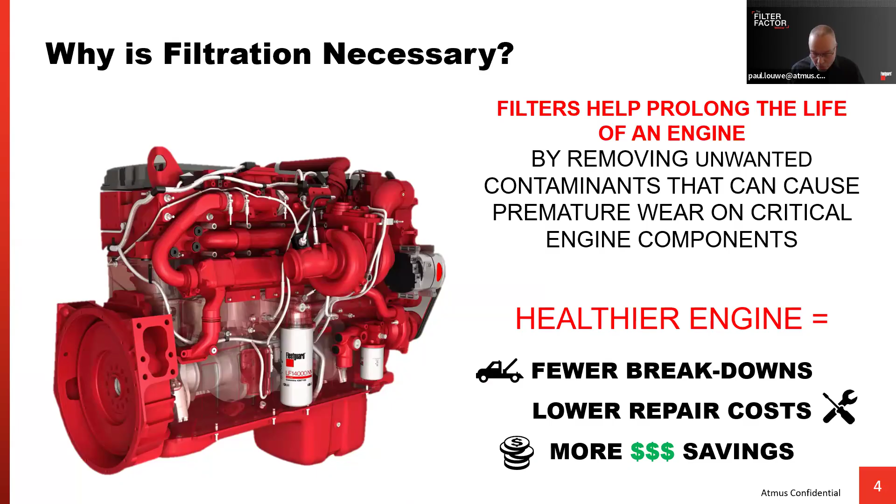So why is filtration necessary? We're going to look at filtration a little bit closer. I'm going to show you another video about air filters and efficiency. It's actually all about protecting the equipment using quality filter media.

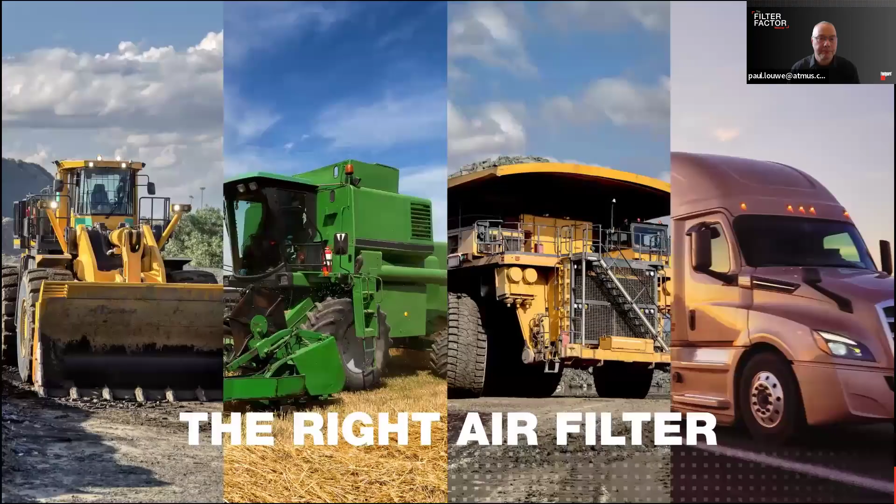Filtration, down to the science. Today, we're talking air filter efficiency. Filter efficiency ratings, 99, 99.9, 99.99%. They're pretty much the same, right? Wrong. Each filter is rated to perform in specific equipment applications and with particular types of contaminants. Using improperly specified or low-quality filters to save a little money can have long-lasting and potentially costly consequences, like lower torque and horsepower and poor fuel economy, all resulting in a shorter equipment lifespan. That's a high price to pay long-term for a small savings short-term. You get what I'm saying? Using properly rated, high-quality filters for your specific equipment and application ensures you get the performance and protection you need to stay productive and profitable. Fleetguard filters offer unmatched media technology to protect your equipment and keep you going. Why? Because when it comes to filters, small things make all the difference. Run cleaner, longer with filtration science.

The video talked about contamination and efficiency. Let's start with explaining contamination. Where is contamination coming from?

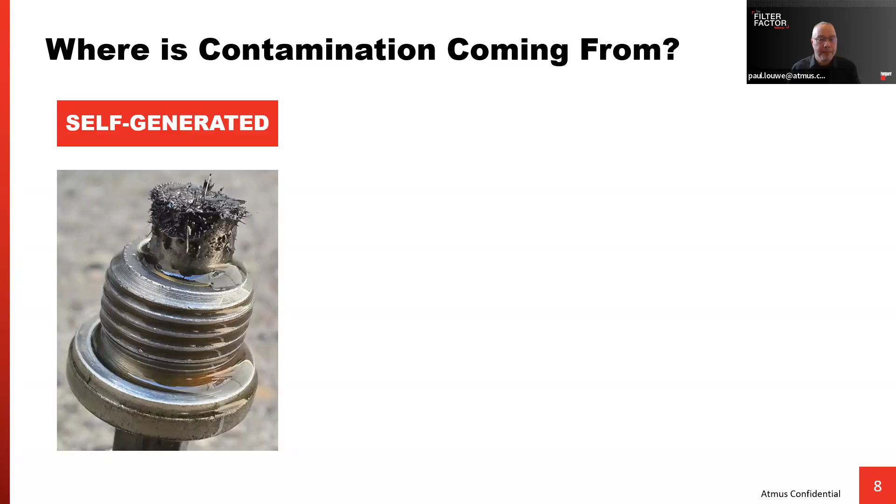Well, the first type of contamination is self-generated contamination. This is a result of normal engine wear and engine component wear that occurs over time. The second type is built-in contamination. These are the left behinds within an engine because of the engine or engine component manufacturing or even rebuild processes. The third and last one is ingested contamination. Particles enter an engine from an outside source.

All these types of contamination must be filtered out from the different engine systems. But of course, the same applies to other types of applications or systems, like a hydraulic system or tank air breathers.

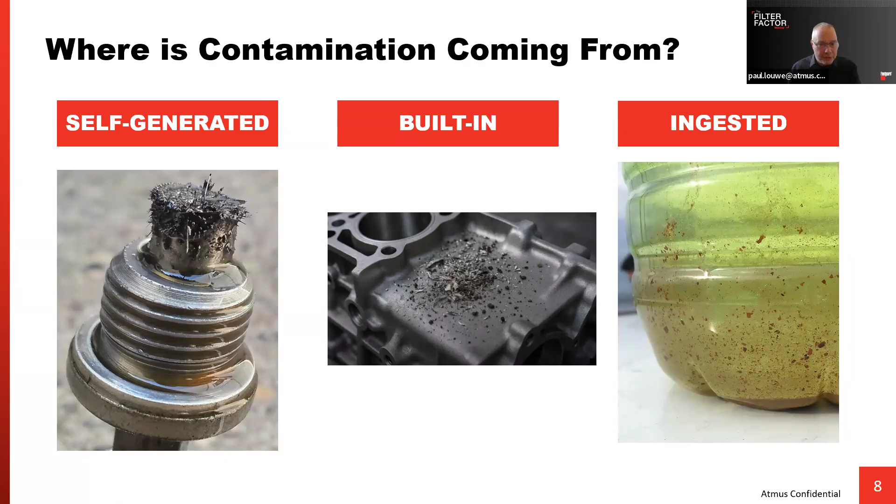Besides contamination in air systems, like this one, other engine systems also need to be protected against contamination, for example, fuel systems, oil systems or lubrication systems, and coolant systems.

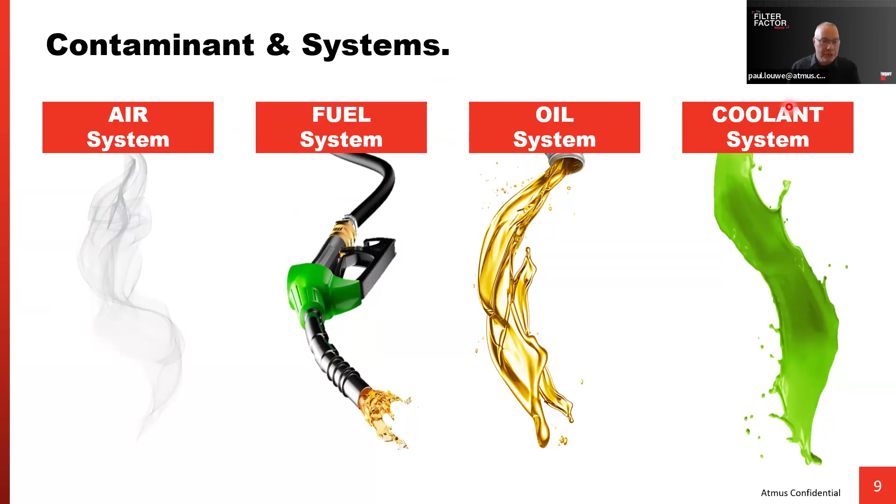This slide is about the types of contamination that we will see in the different systems. In air systems, we mainly see dust, dirt, and sand. This is what we also find in fuel systems. Besides dust, dirt, and sand in fuel systems, we also see water, microbes, and additives.

In the lube system, we will find, besides dust, also wear metals and oxidizing oil, sludge. So poor filtration or low filtration media quality, not efficiently filtering out contamination, can cause unwanted engine and engine component wear, and that results in failures and high TCO, total cost of ownership.

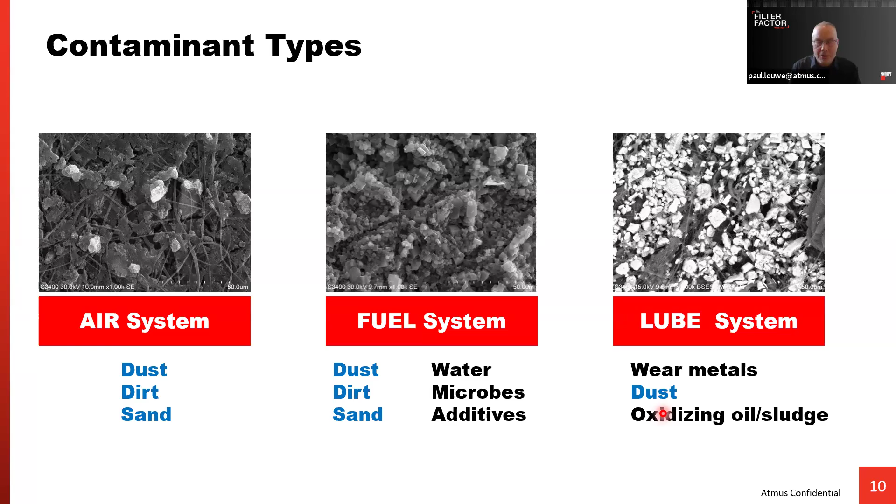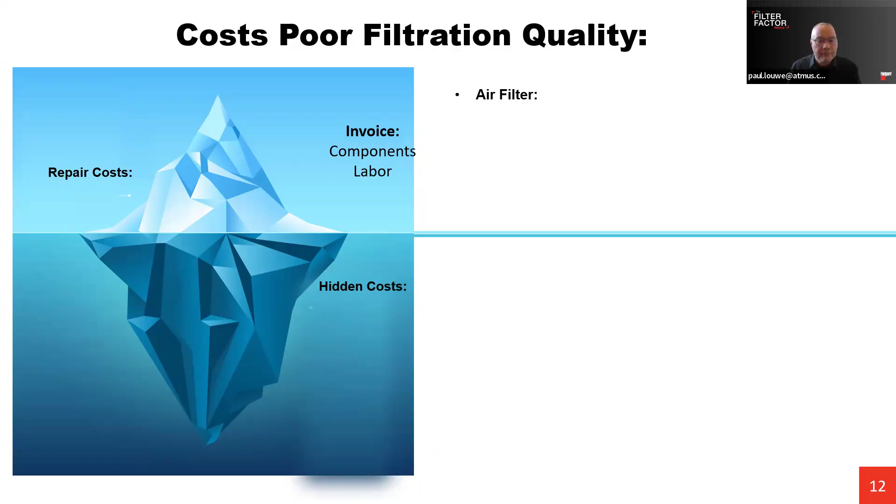Let me give you a few examples of costs when poor filtration media quality is used in, for example, air filters, fuel filters, lubrication filters, causing high TCO. Air filters having poor filtration media quality that results, for example, in a catastrophic engine failure. The engine needs to be replaced. For small to medium-sized engines, we're talking about $6,000 to $18,000. If we only need to replace a component instead of an engine, for example a turbo, we're talking about $4,000 to $5,000.

Something totally different in cost: fuel system component damage to injectors or fuel systems because of poor filtration media, $8,000. And I'm not even talking about engine components, repair, replacement, or after treatment damage costs.

The last one is the cost resulting due to poor filtration or a cheap lubrication filter, $11,000 to $12,000.

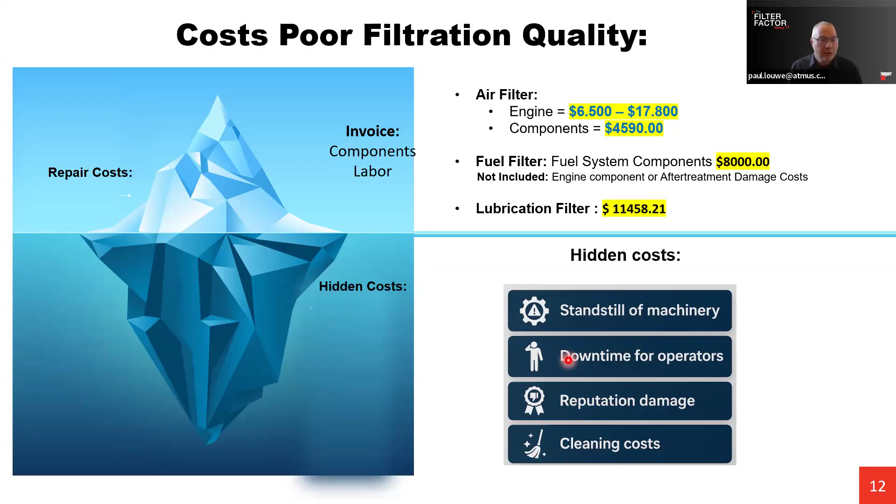Now, besides the repair costs, there are also hidden costs for the fleet owner or for the company. Hidden costs, for example, standstill of the machine, the cost for the downtime of the operator, cost involving reputational damage, or cleaning costs.

So the big question actually now is: is it really worthwhile to compromise on filters? Today's engines require quality filters that are capable of filtering out the smallest contamination particles. But how small is small? With today's engine technology, we are talking about micron size small.

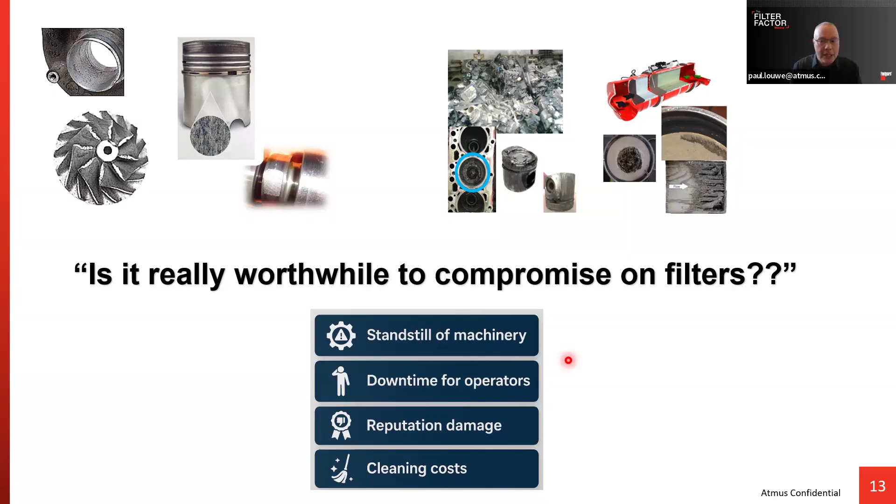We're talking about bacteria size small, micron rating. For your information, 1 micron is 1/1,000,000th of a meter. So it's very, very small.

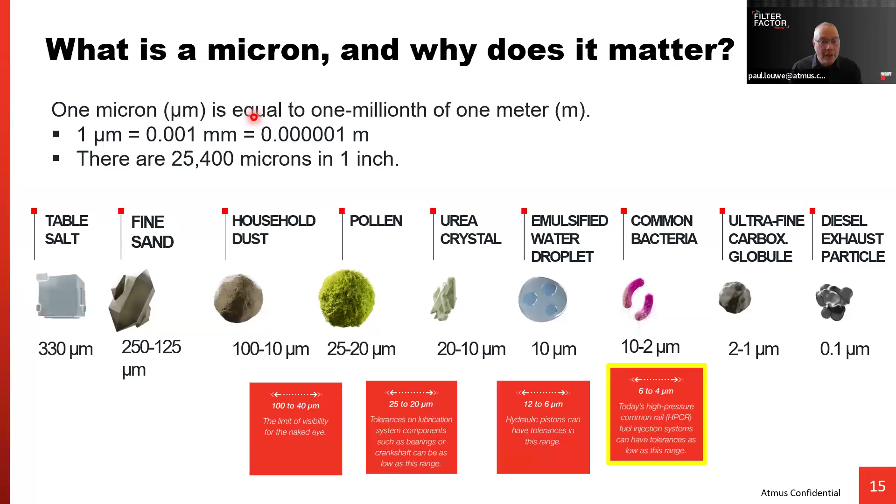Now, with having the contamination explained and the possible cost when poor quality filters are used, let me move to explain efficiency and beta rating. I'm going to start with explaining efficiency first.

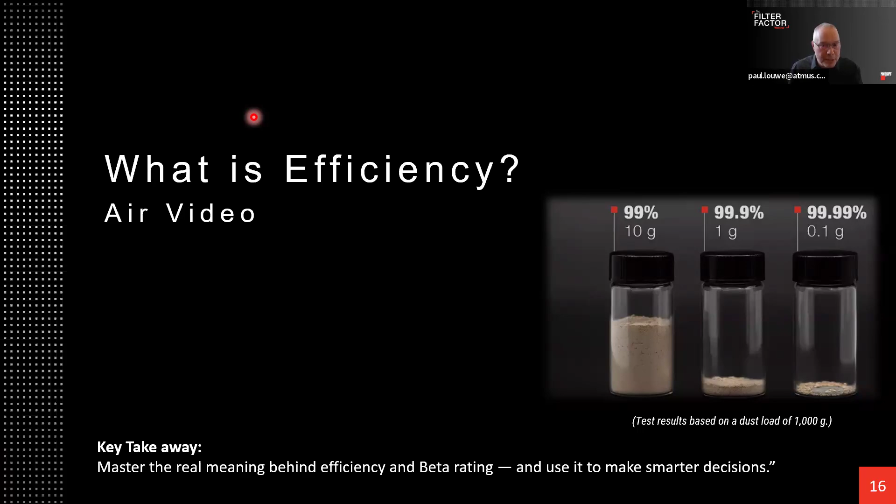So the air video talked about 99%, 99.9%, and 99.99% efficiency. But what does this terminology mean? We're going to use this example.

What we see here is the filter and the inside of the filter. This is the filter media. With this example, the media pores is 10 micron. We have the inlet side of the filter, for example a gas or a fluid like fuel, gas, LNG, or air, oxygen, containing dust or sand or dirt or microorganisms like we discussed with fuel. The inlet side is also called the upstream side, and we have the outlet side, which is the downstream side.

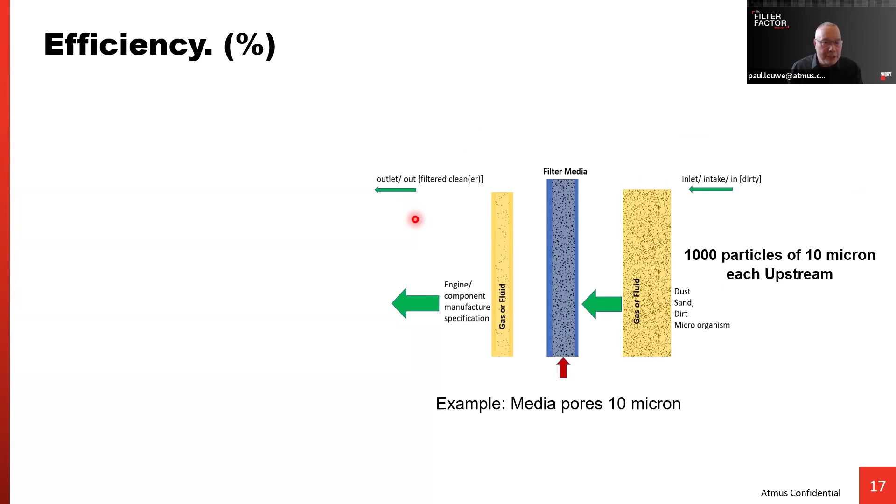If we present 1,000 particles of 10 micron each upstream, then the efficiency is the ratio between the number of particles captured by the filter media, that is what we see here, and the number of particles presented upstream, the 1,000 particles in this example.

So the air video talked about 99% efficiency. What does this mean if we present 1,000 particles upstream? Then 990 particles will be captured by the filter media.

With 99.9% filter media efficiency, 999 particles will be captured by the filter media.

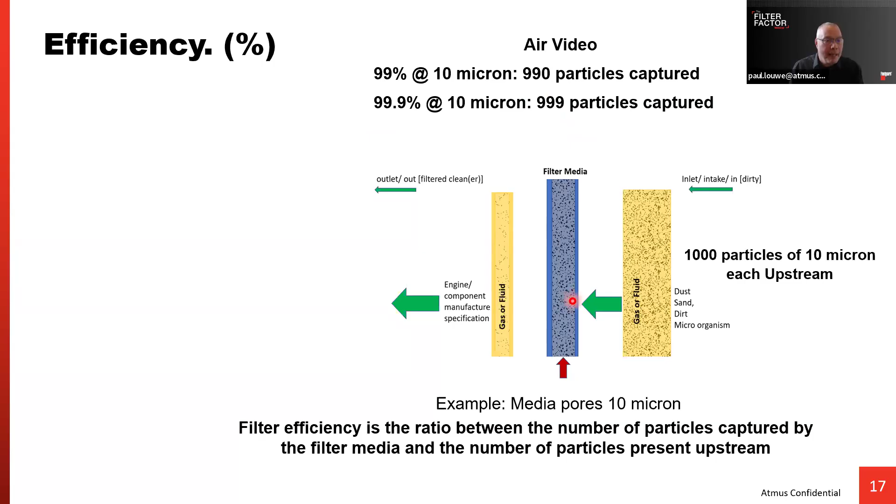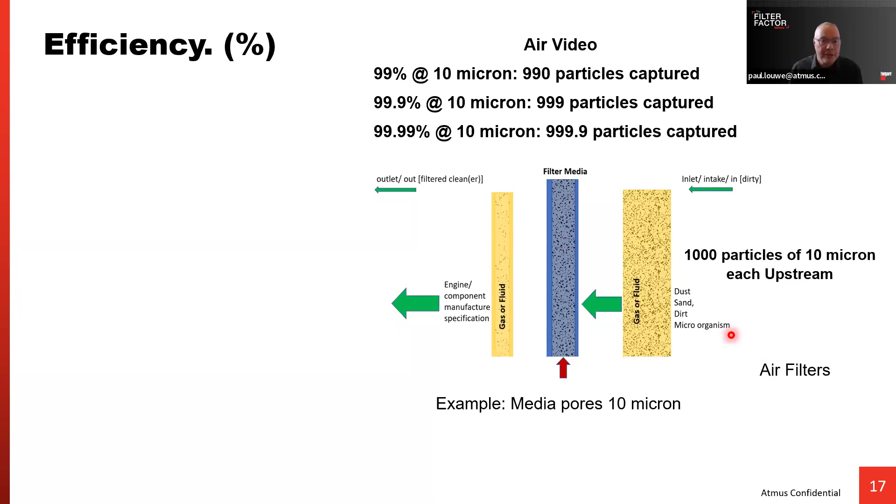So what is beta rating? I'm going to use an example of beta 10 equals 20. That is what you see here.

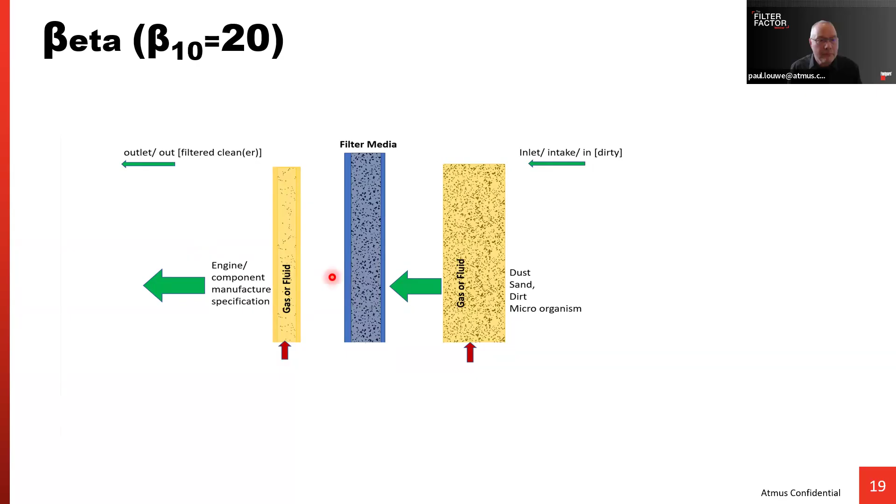We're going to use the same setup: inlet, upstream, downstream, the outlet, the cleaner side of the filter. But we're not going to look at the captured particles in the filter media. Again, with 1,000 particles presented upstream and then 50 particles seen downstream, the beta ratio is 20, because 1,000 particles upstream divided by 50 particles downstream gives a ratio of 20. So beta 10 micron is 20, because of the ratio between upstream and downstream.

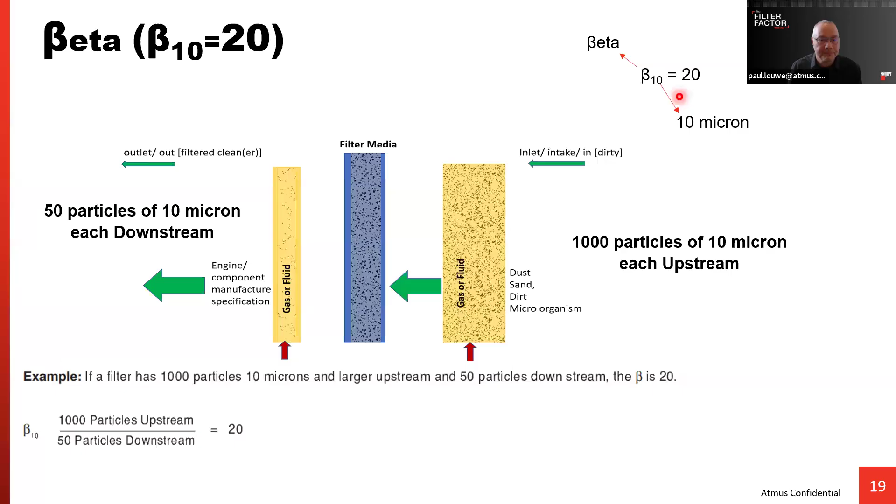Where do we see this data? Hydraulic filter data sheets, and more on fuel filter data sheets.

But what is the advantage of using beta rating instead of efficiency? Well, with today's engine technology using the high pressure common rail fuel system, ultra clean fuel is needed downstream. Downstream means fuel flowing to the highly sensitive fuel components. And only beta rating makes this instantly visible.

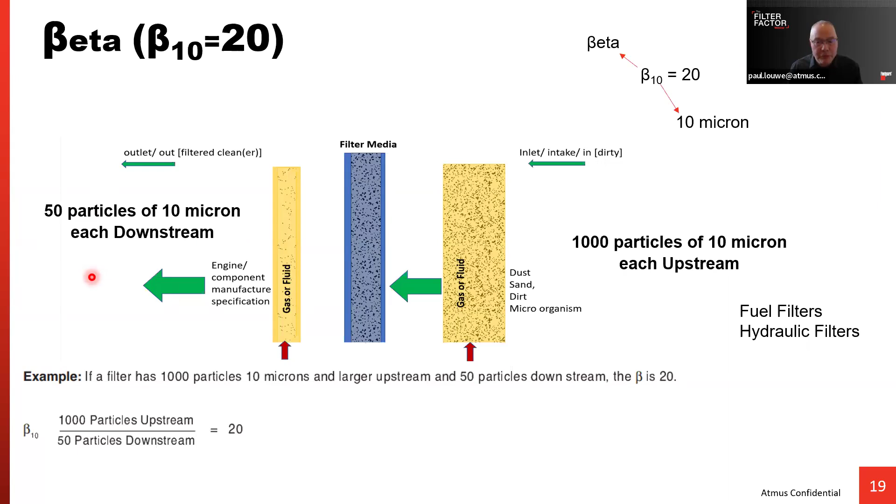With beta rating, the performance differences between filters are truly visible. But how does this work? I'm going to explain that on the next slide.

In other words, the advantage is that with beta rating, we instantly see the improvement in removing harmful contamination. In this example, we have 100,000 particles upstream, so the dirty side of the filter, or we can also say 100,000 particles presented to the media.

To explain downstream, the clean side of the filter, we have mentioned different numbers of particles, from 50,000 to 100 particles.

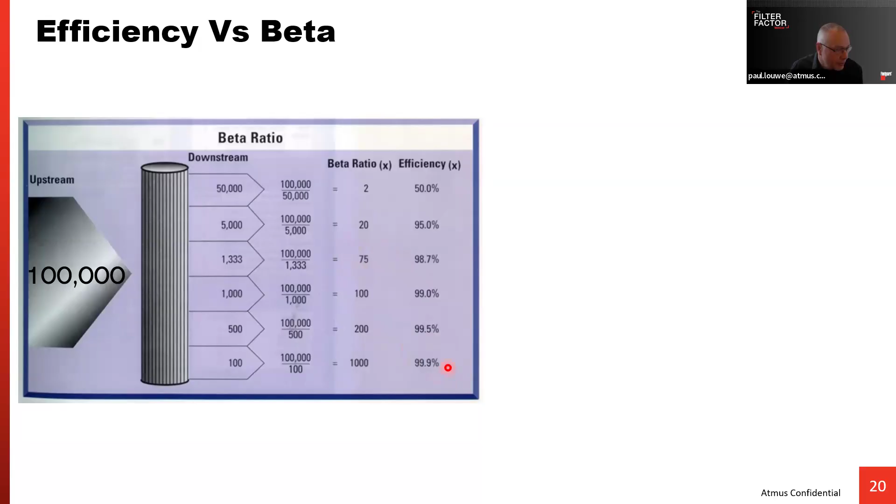Now we're going to look at beta 75 versus beta 1000. So, 98.7% and 99.9% efficiency. 98.7 equals a beta rating of 75, and 99.9% equals beta 1000.

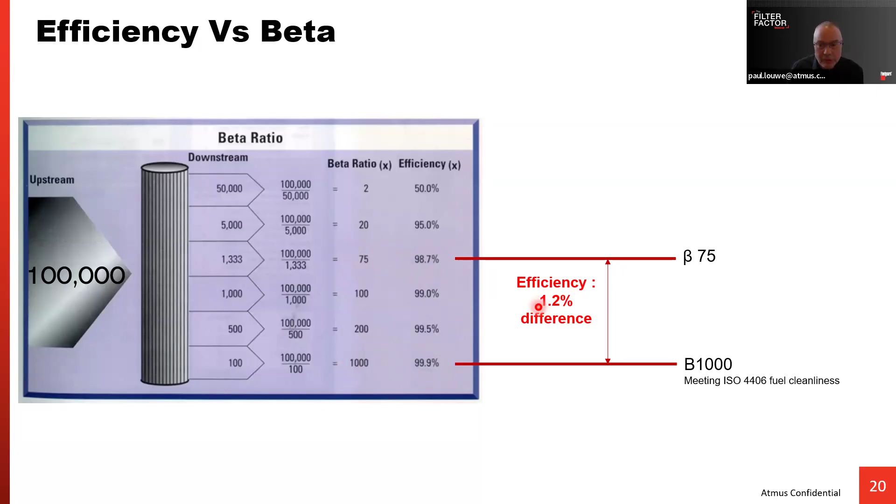The efficiency difference between 98.7 and 99.9 is only 1.2%. So people think, oh, that's not a lot of difference. But with beta rating, what we will see is that a beta 1000 is 13 times cleaner downstream. Beta 75 versus beta 1000 means the beta 1000 is 13.3 times better. Beta 1000 versus beta 20 means the beta 1000 is 50 times cleaner downstream.

Notice also that a beta 1000 is also meeting the ISO 4406 fuel cleanliness standard, which I will explain a little bit later. But as mentioned, not all data sheets mention beta rating, so there is a very easy formula to convert efficiency to beta rating, and that is what I'm showing here.

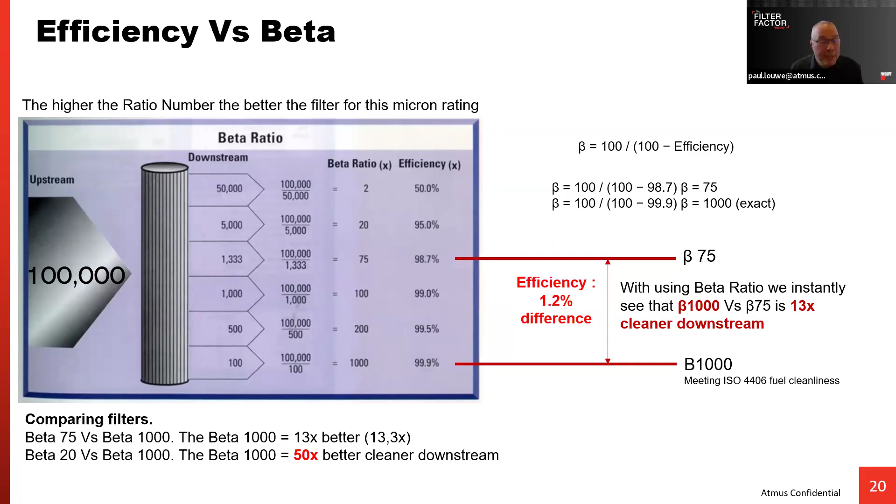Now, with having explained the particle size and the rating, efficiency and beta rating, the next slide is an example of real filter media performance, protecting sensitive equipment and minimizing downtime. That is what we see here again, the ISO 4406 fuel cleanliness.

Now, without me going to explain the ISO 4406 in depth, it is, I think, good to know that fuel system manufacturers like Bosch, Delphi, Denso, or Cummins, and also other injector or high pressure common rail fuel system manufacturers, are using this ISO 4406 as a standard. It's a standard fuel cleanliness code for modern high pressure common rail diesel systems.

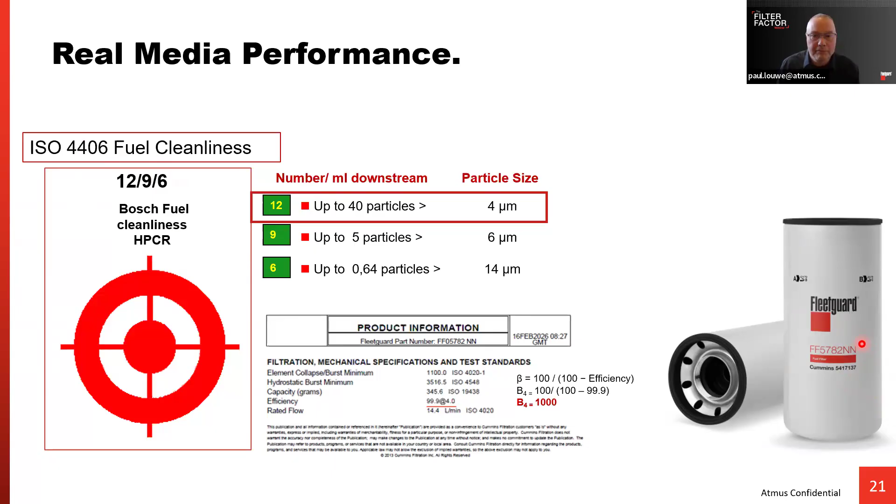So what was the key takeaway of this part of the training? Well, efficiency is what the media captures, and beta ratio gives us a true indication of how reliably the filter protects. Beta rating is what reveals the real performance difference between filters, and that is actually the information you need to make the right choice.

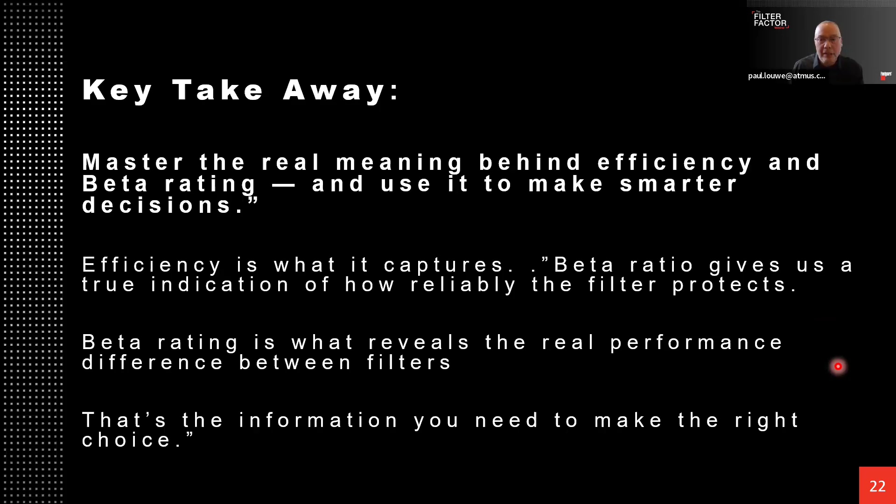Now, with having explained efficiency and beta rating, and the differences between them, there are 2 additional subjects, capacity and flow restriction. A 1-slide explanation: capacity of a filter is the amount of contamination that a filter can hold, and flow restriction is the amount of resistance that an air or liquid experiences when passing through a filter. Efficiency, capacity, and flow restriction are all the important topics to design a filter.

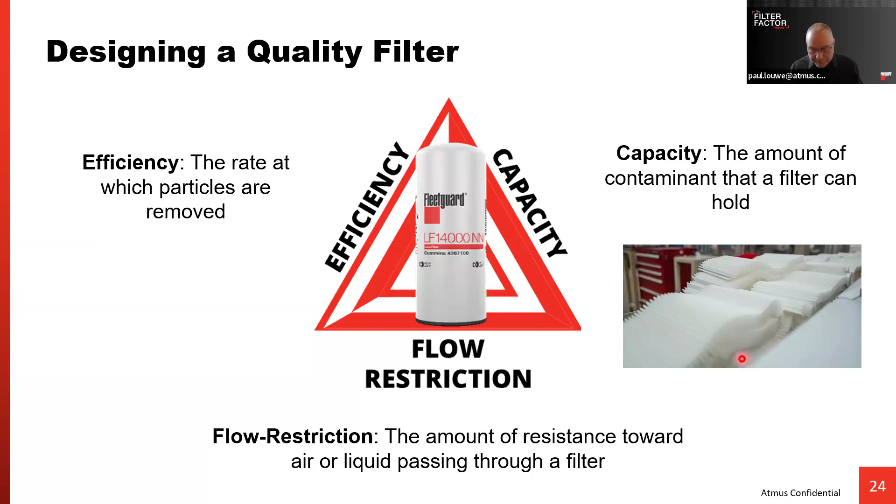And all filters have one thing in common, and that is filter media. So now we're moving into the heart of filtration, the filter media.

So where is filter media made? Well, some filter manufacturers do manufacture their own filter media, but most filter manufacturers do not produce or manufacture their own media. Cummins, however, designs, manufactures, and tests our own filter media in-house. It's proprietary, and we do not make this filter media available to any of our competitors. So it's unique to Fleetguard filters.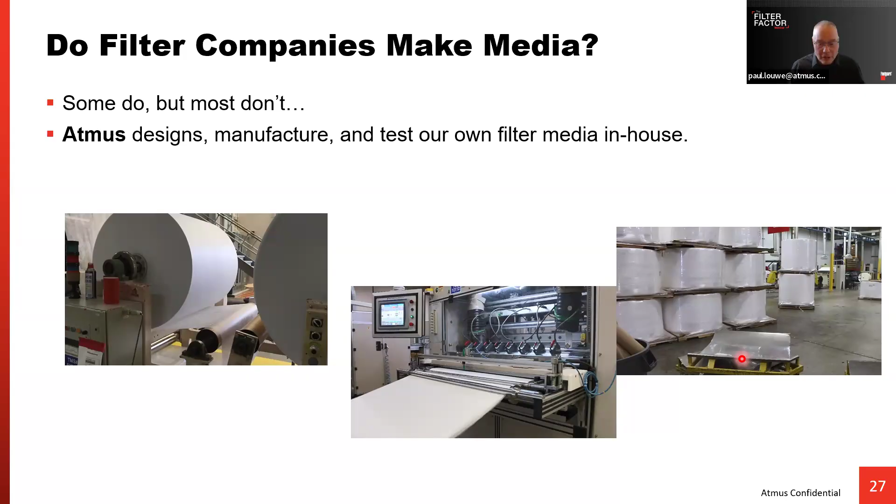So what types of media are currently used in filters? I'm going to show you another video, which is an introduction to the types of media.

Filtration, down to the science. A filter is a filter is a filter, right? Maybe at a glance. So what makes a filter different? It's what's on the inside that counts, the media, the stuff that actually captures the contaminants. Filter media must be tailored to the specific medium it's filtering. Providing the right media option ensures the highest level of performance and protection. Cellulose media, with its larger fibers, is effective at trapping larger contaminants. Microglass media's smaller, more uniform fibers increase filter efficiency and meet the higher performance demands of equipment.

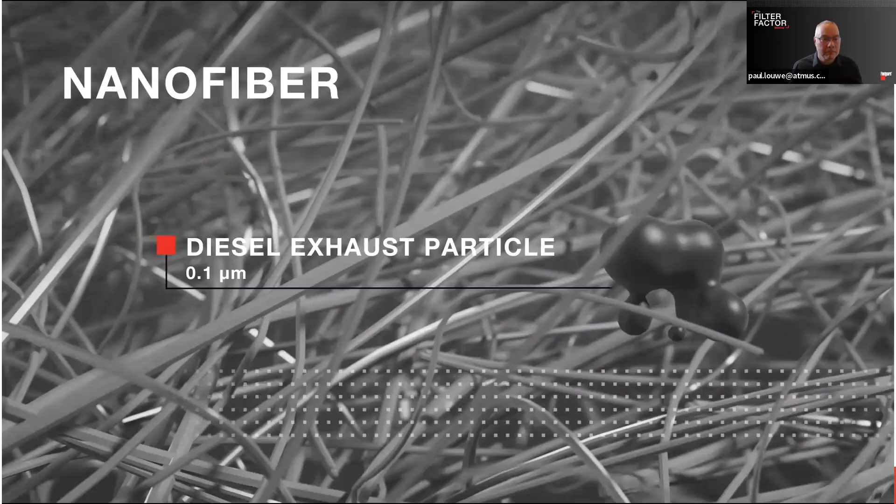Melt-blown media's fine continuous fibers efficiently capture smaller contaminants, even down to the size of bacteria. Nanofiber's submicron, continuous fibers provide an optimal balance of ultrafine and large particle removal, holding capacity, all without restricting flow.

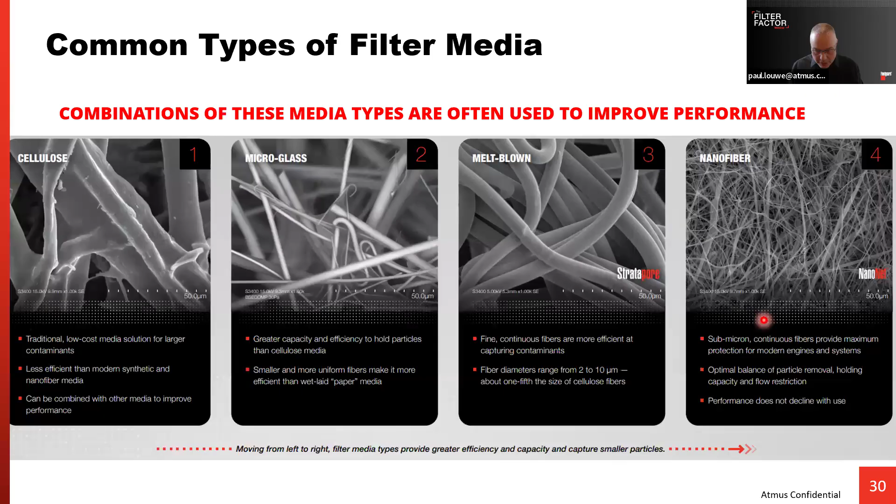I'm going to highlight three types of media used in Fleetguard filters, each designed for a specific and exceptional purpose. Starting with cellulose. What you see here is a stacked disc filter media. It's the bypass filter part of a combination filter. It's called a combination filter because it's using a bypass filter and a full flow filter part in one filter housing.

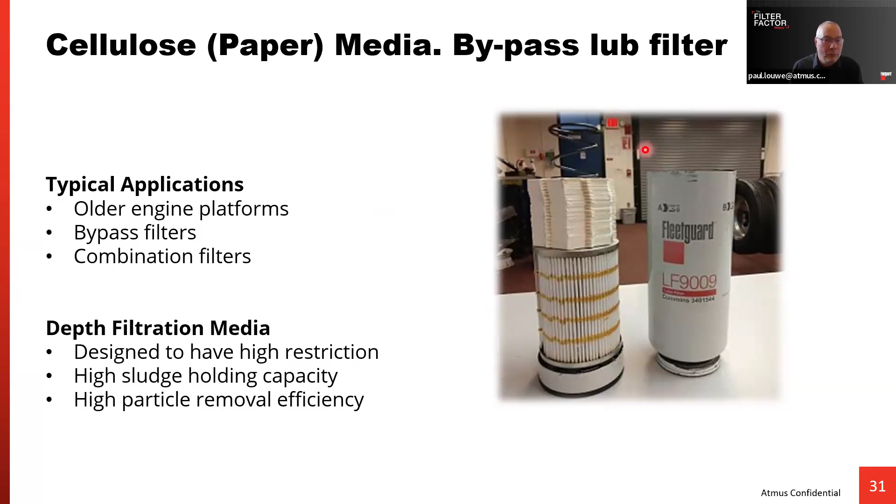This type of stacked disc media is used on older engine platforms, but remember, a lot of them are still out there in the field and they are performing extremely well. As mentioned, this is the bypass filter part of a combination filter, full flow and bypass in one housing. It is the bypass filter that is a cellulose filter.

It's designed to have a high restriction. That means the oil through this filter will flow very slowly, capturing all that contamination. It's got a high sludge holding capacity and a high particle removal efficiency.

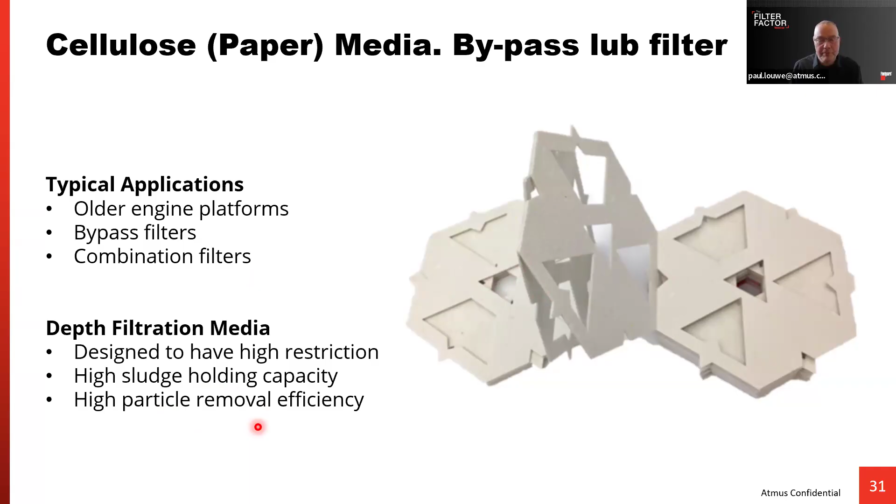The next media I want to show you is melt-blown media. Melt-blown media is fully synthetic filter media. We melt down these pellets into a fluid and then spray it onto a rolling drum. Then these fibers are stretched and turned into a sheet.

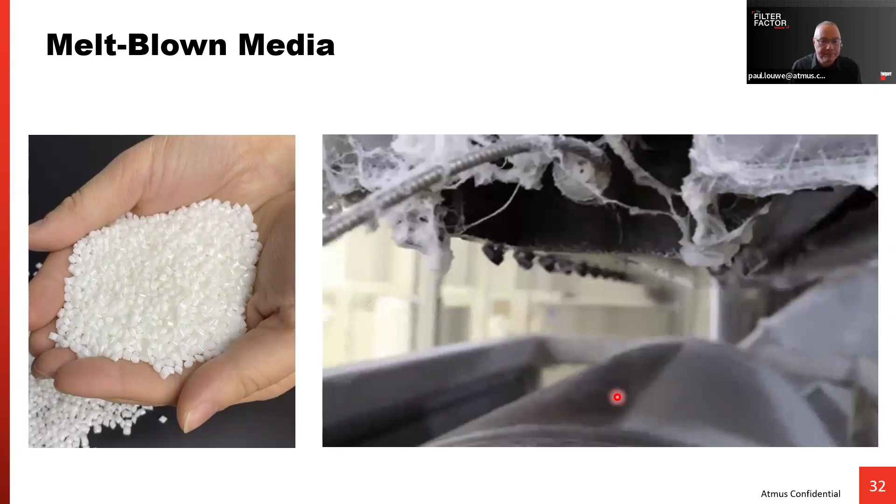Melt-blown media is a depth filtration media. It has continuous uniform polymeric fibers. It's got a high dirt holding capacity, high particle removal efficiency, 98.7% at 10 micron, for example, used in fuel water separators, and 30 micron for lubrication filters.

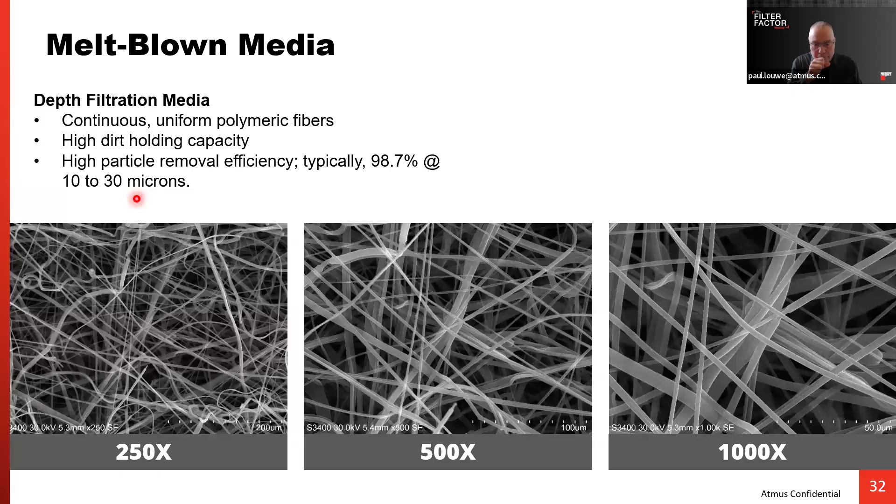We're not using a glue. We have multiple layers on top of each other, offering finer and finer filtration. So high efficiency, high particle removal, and the result of that multi-layer is that we have greater contamination holding capacity. Each layer can hold contamination, and also lower restriction than the previous media, the cellulose media.

Many Fleetguard products are using Stratapore media. So watch for the logo, the Stratapore sign, on the filters, because then you know that the filter is using the Stratapore media.

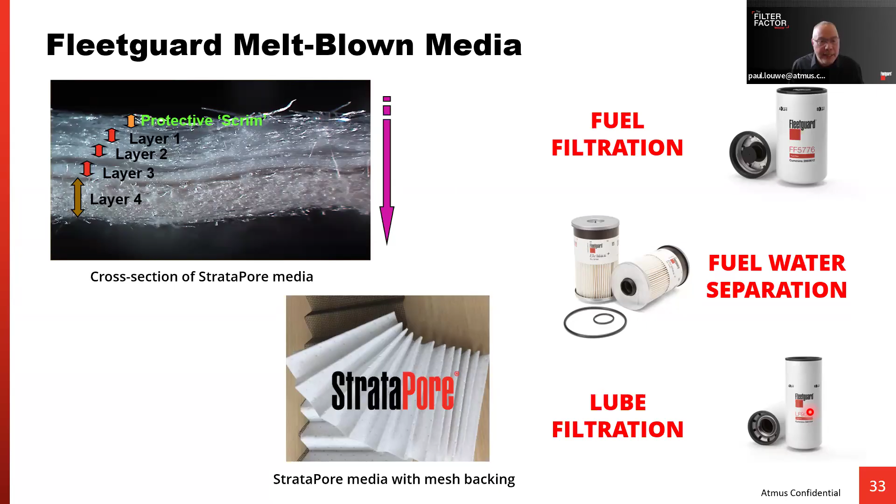As mentioned before, today's engine technology, using high pressure common rail fuel systems, needs even better filtration. So why do we now need nanofibers in our filter? And what is the difference between traditional filter media and nanofiber? Well, contamination above 4 micron needs to be filtered out from the fluids, and that's what we already learned from the ISO 4406 explanation. So from multi-layer Stratapore media, we're now moving into the nanofiber media.

Why do we need nanofiber technology? It's all about engine evolution, the high pressure common rail system, and also the different oils that we're now using. I'm going to use the high pressure common rail as an example. High pressure common rail uses very high injection pressures, and the fuel pump is capable of producing even higher pressures. We're looking at 3,500 bar today that a fuel system is capable of producing.

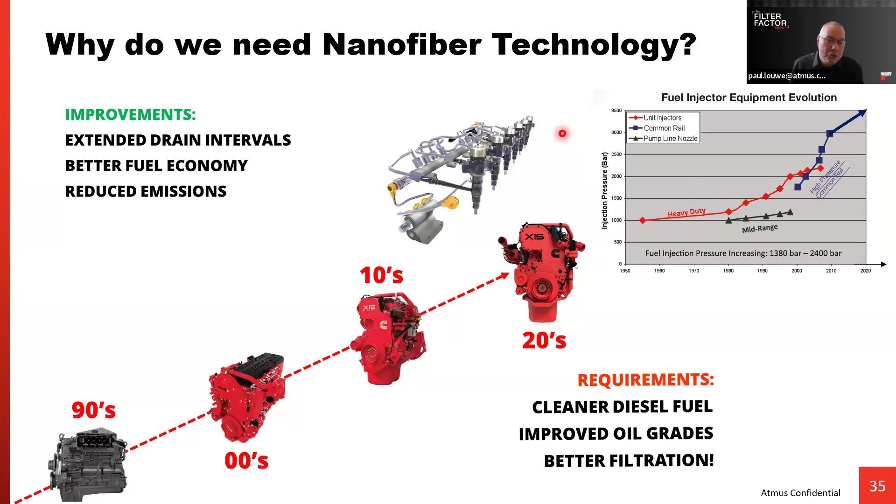These particles accelerate wear inside the high pressure common rail, resulting in reduced engine performance, higher fuel consumption, and worst case scenario, costly component damage.

NanoNet has the nanofiber media, and this media meets today's engine filtration cleanliness in transient engine operating conditions. That means during engine vibration and flow surges, when the engine or equipment accelerates or decelerates.

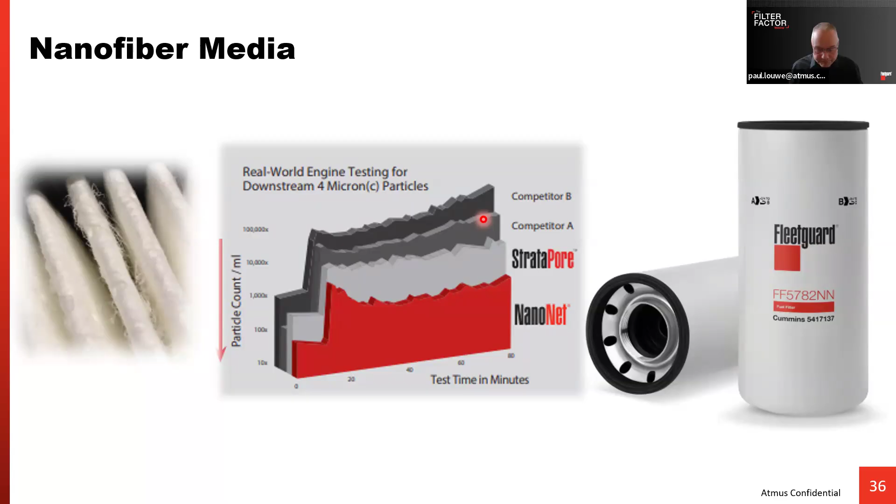When we start the test, both filters are meeting this standard, but soon, after a few minutes, we introduce vibration at this point. What we saw is that the will-fit filter starts releasing contamination downstream to the sensitive fuel components, while the FF5782 NanoNet filter fully meets the ISO 4406 standard.

And again, I'm sharing here that datasheet: 99.9% at 4 micron, so meeting the beta 1000, and it's a NanoNet filter.

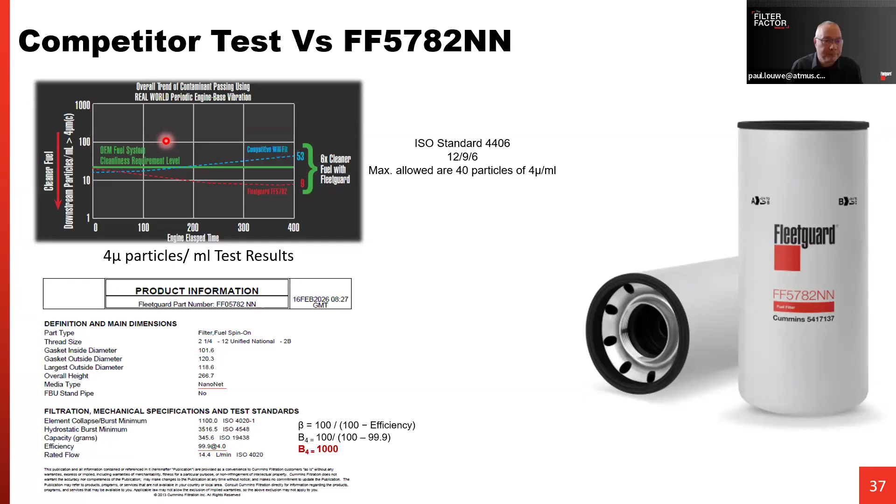What's the difference between NanoNet and the traditional filter? In this example, 3 to 5 micron size particles. You see the cellulose on the left image has large pores. These particles will just flow through these pores downstream to the sensitive components, while NanoNet is capturing these small particles.

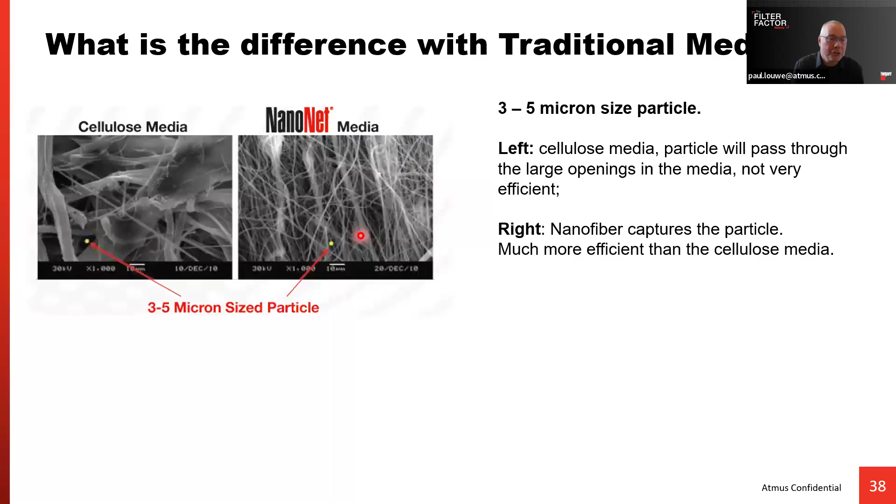Another point I'd like to mention is that technical bulletins or advertisements in literature state that filters meet laboratory testing parameters. But ask yourself, how many engines operate in a lab? So with nanofiber media, like NanoNet filters, they hold contamination during dynamic or transient engine operation conditions in the field with vibration and flow surges.

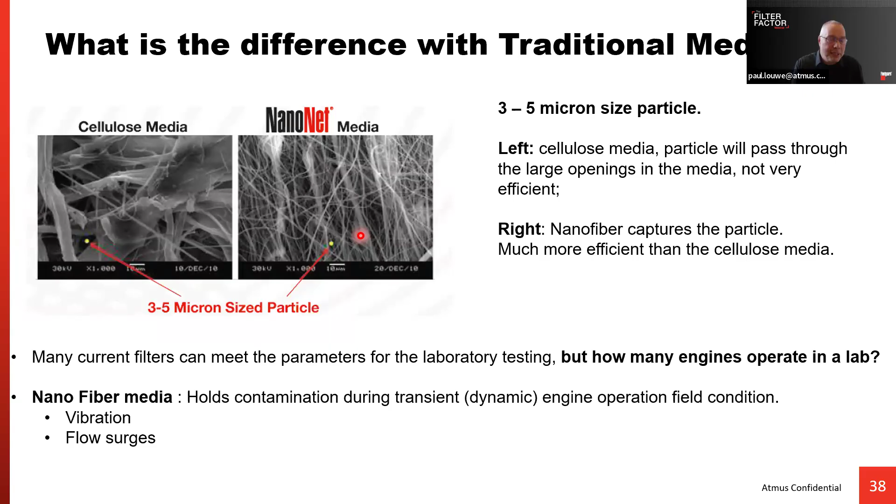Here you go. So how is that NanoNet fiber or media, the nanofiber, made? Here's another video to give you an impression.

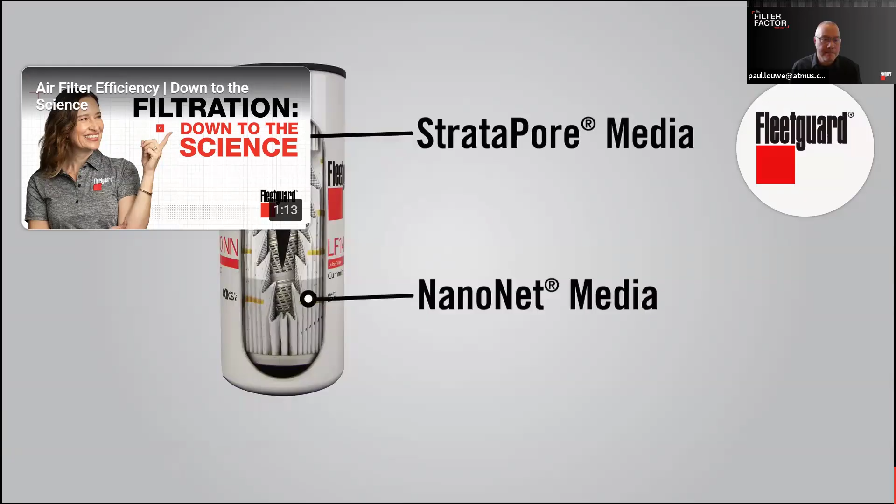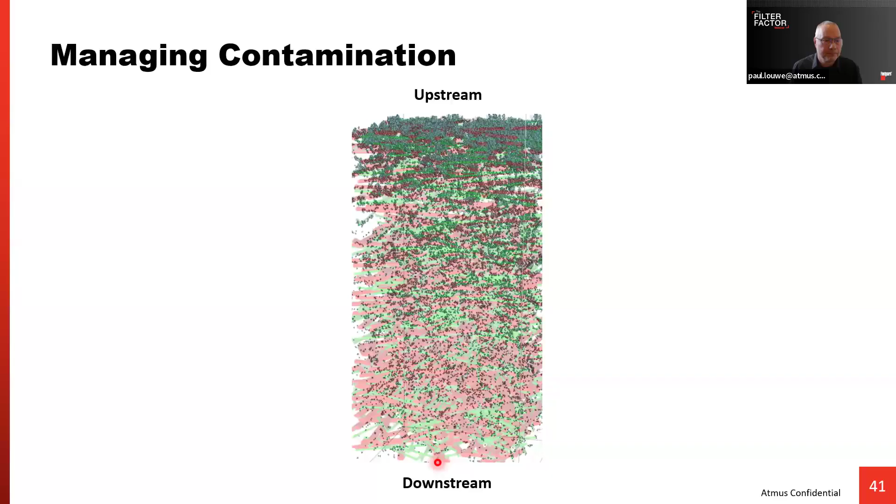So NanoNet retains contamination in real-world conditions. I'm sharing here the result of a field case study where injector claims dropped by 42% for Cummins using NanoNet filters versus non-NanoNet filters. Fleetguard filters made with NanoNet media provided 5 times more protection throughout the filter life.

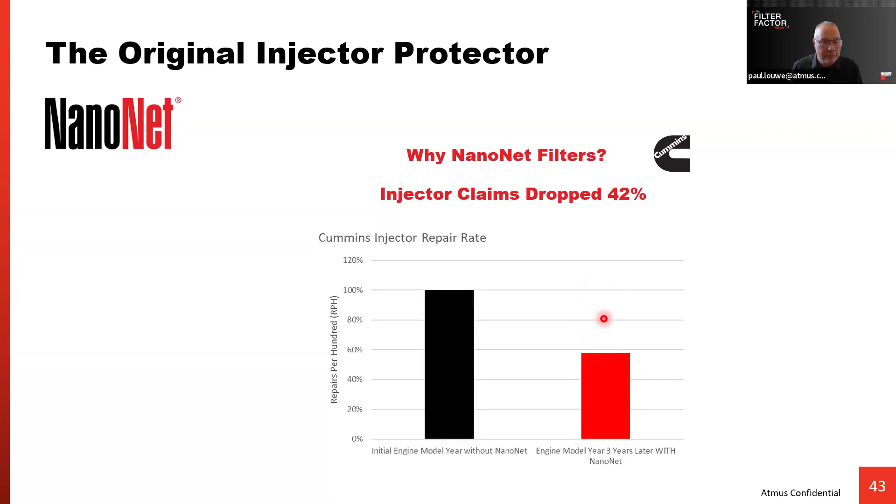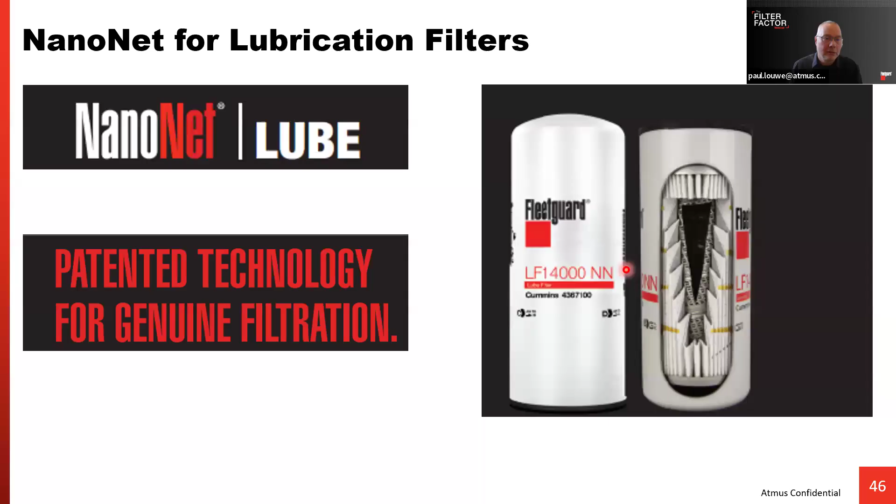NanoNet products in our product range include NanoNet fuel filters, NanoNet lubrication filters, and NanoNet, that is what we see here. Behind the part number, NN means NanoNet, and with air filters we have NF, NanoForce.

Key takeaways from this part of the training: the Fleetguard NanoNet media delivers higher efficiency, longer life, more stable protection, and controls smaller particles under real-world conditions.

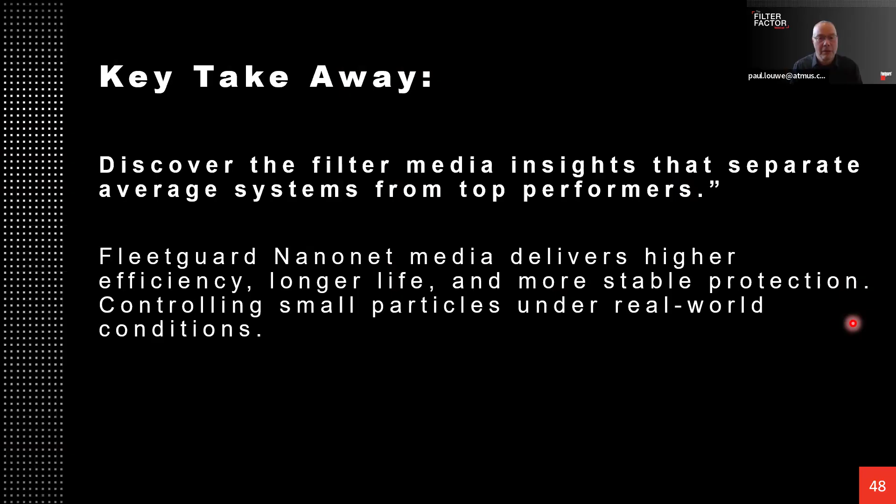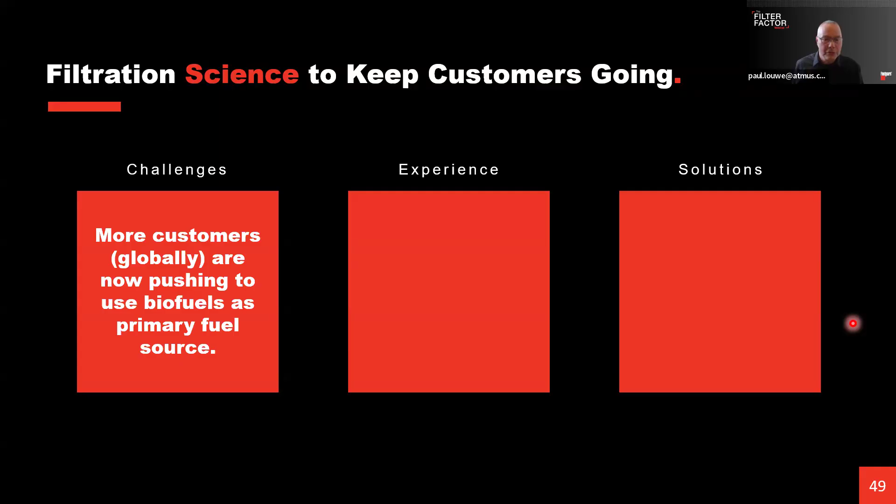So it is our filtration science to keep the customer going, especially with more customers globally now pushing for biofuels as a primary fuel source. Fleetguard is very good at, and highly motivated by, analyzing customer needs and solving technical problems. Fleetguard can tailor-make filter solutions for specific customer applications.

And that brings us to our next topic: what's on the horizon for the next generation media technology?

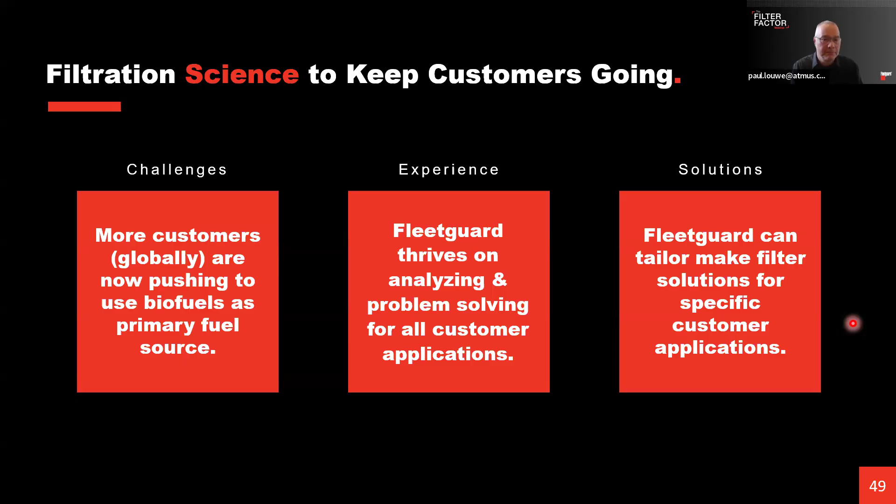So we have NanoNet Plus, or NanoNet 2. NanoNet 2 offers better protection, longer service intervals, and 10 times better particle removal efficiency. It has excellent performance in poor fuel conditions. The media on NanoNet Plus is no thicker than 1.35 millimeters, so that's very thin and very efficient.

NanoNet Plus stays efficient under vibration, including transient engine conditions and flow surges. That is where competitor filters start to release particles downstream to the sensitive fuel components.

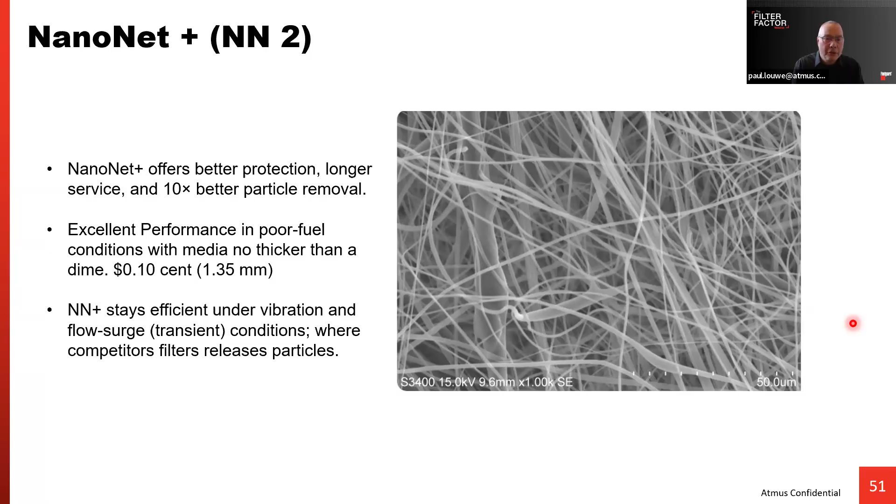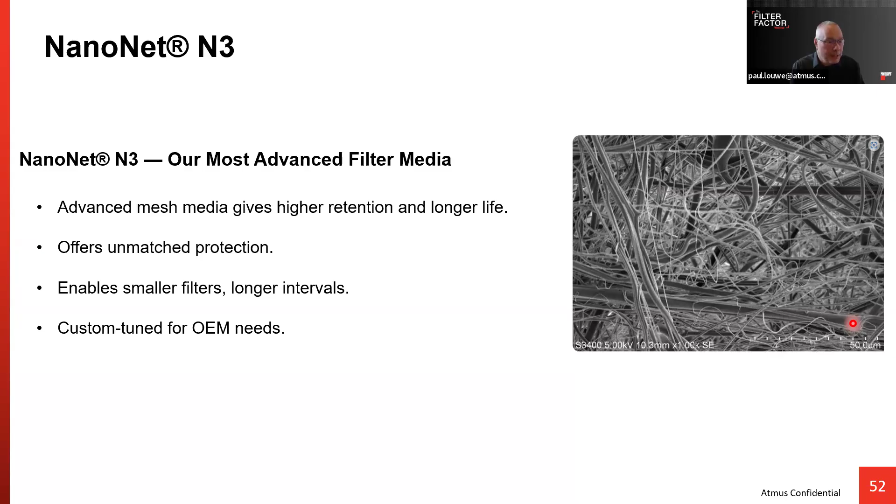Another update is our NanoNet 3, our most advanced filter media. It has an advanced mesh media that gives very high retention, dirt holding capacity, and even longer life. It offers unmatched protection, enables smaller filters, with longer service intervals. It can be custom tuned for OEM needs, and importantly, it uses fewer materials, so we use less energy. It's better for sustainability.

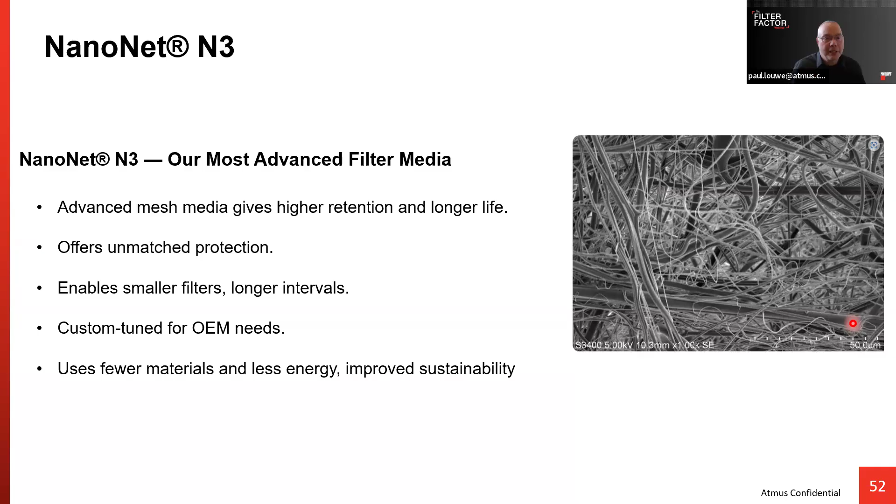Key takeaways from this part of the training: from NanoNet to NanoNet Plus, NanoNet 2 to NanoNet 3, each generation raises the bar higher in efficiency, stronger beta rating, beta stability, and unmatched real-world reliability for maximum engine protection.

If you want to learn more, go to fleetguard.com, the Knowledge Center, at fleetguard.com/knowledge-center. You will find several topics. I'm mentioning four of them: How does an air filter affect engine performance? The full filtration story you really want to know, some interesting stories there, and why filtration matters - I really recommend that part. And diesel fuel filter frequently asked questions.

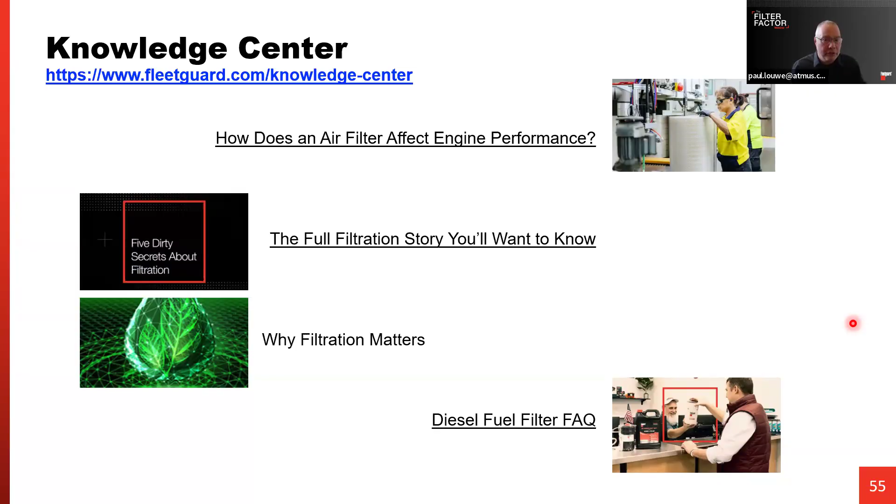Something about warranty: backed by the best warranty in the industry. Fleetguard warranty coverage is non-prorated. It's peace of mind for anyone using our Fleetguard products. Go to www.fleetguard.com/warranty.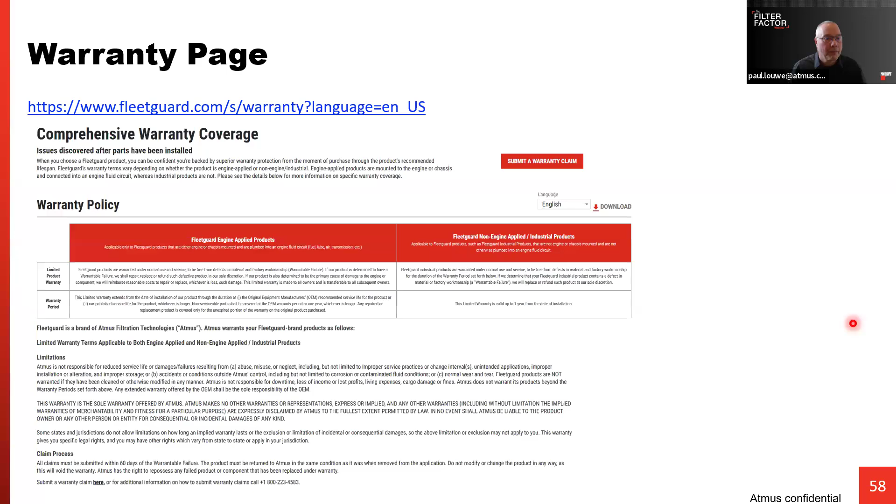Thank you very much, Paul. In fact, we don't have questions so far in the Q&A box, so I would encourage everyone to please go ahead and write your questions down in the Q&A box that you can find at the bottom of your screen, and we would be very happy to answer them. So meanwhile, thank you, Paul, for this wonderful explanation about the media generation, and how the media shifted from cellulose to NanoNet. That was a great explanation.